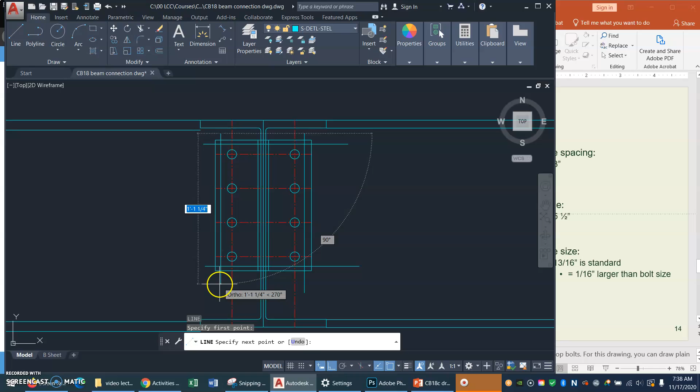Now I would like to trim this quickly. Oh, yeah. So I'm going to do my thing here where I just make a temporary line, some random line that I can trim to. I know this is not precise. Forgive me. If I wanted to be precise, what I sometimes do is I actually draw a bigger circle around each small circle and trim to that circle.

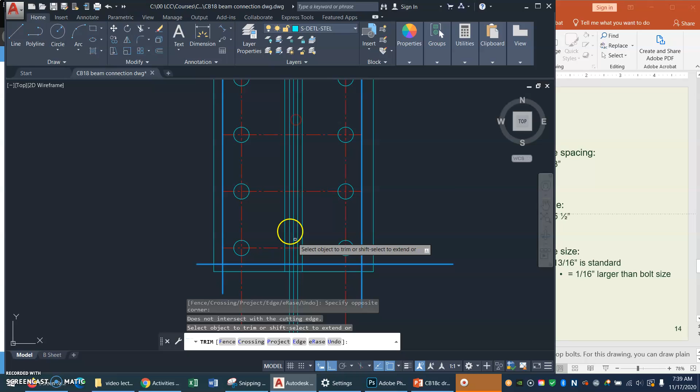Okay, and why I'm doing this is I'm going to go TR for trim, select cutting edges. I'm going to select my temporary lines as my cutting edges, enter, and then I'm going to do a right crossing window and select my center lines to trim. This can go wrong if you zoom the wrong way. And there. Okay, good. Now I can delete my temporary lines, and I've got some nice looking center lines. See that?

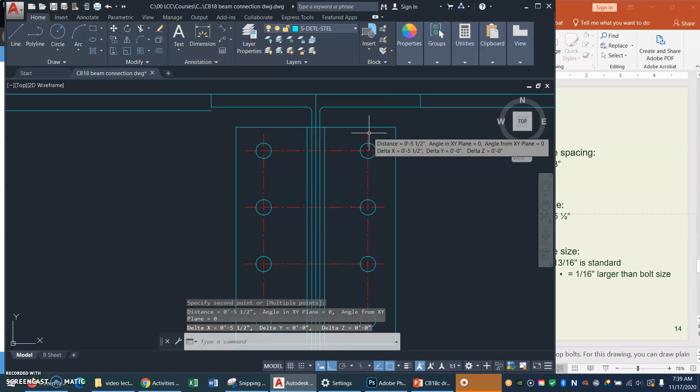Okay, I could now put these center lines up in my top view. You know what? I want to make sure that these really are 5.5 inches apart. So I think I will get the distance command, DI for distance, and just measure from here to here. Yeah, it is 5.5, so good. Yay.

Now, how about I get on the center line layer, and I will draw a line from here up to here. I'm going to snag onto the end point of my center line, you see, and go up here. And now I will just grab that grip and move it up here. Maybe these lines are not a precise length. That's probably okay. They don't tell us what the gauge is.

Something looks bad. Oh, I see. See how these angle irons are not lined up? Do you know why that is? Because this big beam over here has a thicker web than this little beam over here, which has a thinner web. So if you bolt these angles to these webs, they're not going to be totally lined up. Ha!

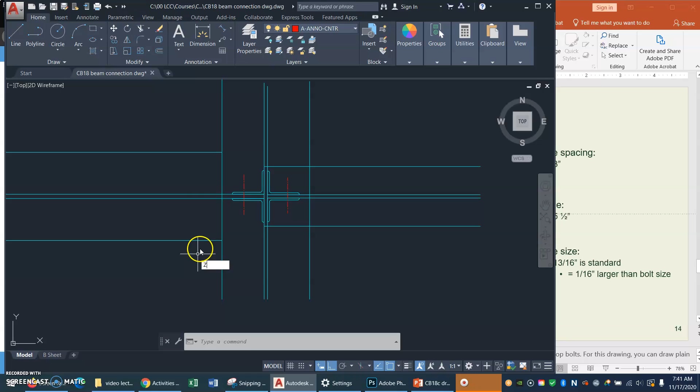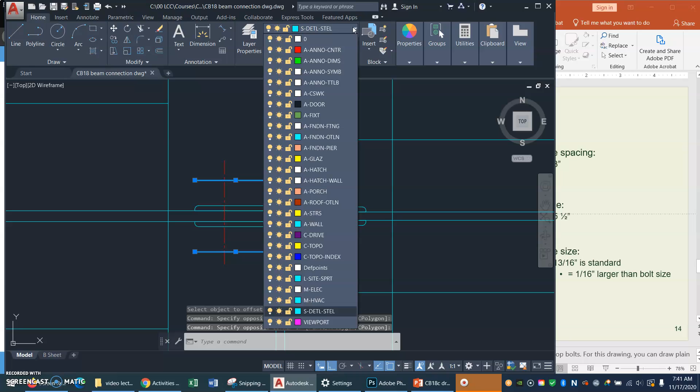We don't know what the gauge is front to back, so I think what I'm going to do is just put center lines in approximately the middle here. I think I will go offset 1.5, and I will just offset 1.5 from here up and here down, and I will be cool and change these to center lines. So I'll select those lines and click on the center layer.

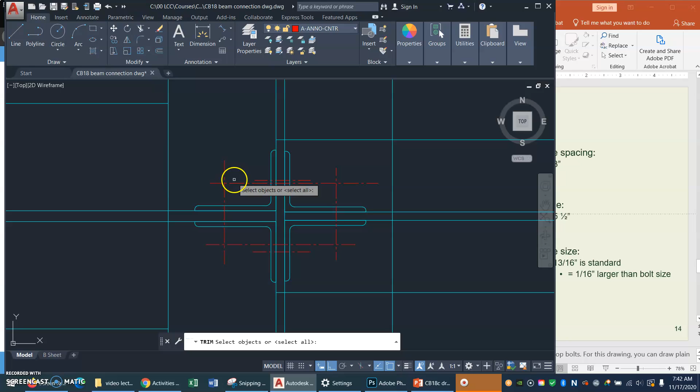And now I'll just move these lines over here and maybe shorten them up a little bit. Click on the grip and move it over. I grant you these look too long. Alright, fine. I will do a trimmy thing. I'll make a temporary line and a temporary line. I'll say trim, and I'll use this temporary line as my cutter, and I'll trim, trim, trim my two center lines, and now I can erase, E for erase, those two temporary cutters. Okay, there's that.

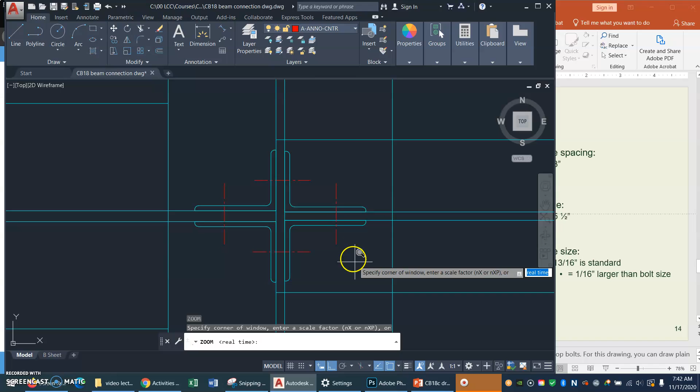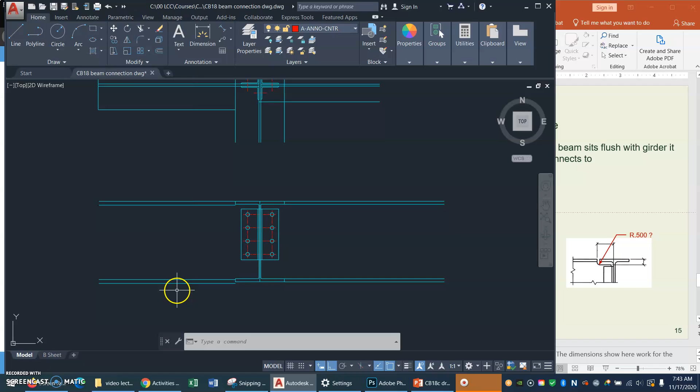Now I think we want to do the cope, don't we? So according to this, the cope is going to be 6 inches to the side of the center line. Is that right? No, it's going to be 6 inches out from the web on each side. That means I probably don't need this center line in here anymore. I was saving that center line in order to make the cope, but apparently we don't need it. So I'll just erase it.

All right, what are we doing? We're coping 6 inches out from the inside of the web on each side. So I will get an offset command, and I will offset a distance of 6, select the web, offset, select the web, offset.

And now, to make this easy, I'm going to get the extend command, which is hiding under the trim command. See, there it is, extend, or you can type EX for extend. And for my fence to extend to, I'm going to use the outside surfaces of the flanges. Enter. And now I'm going to click the end of the line that I want to extend.

Okay, that is where my cope is going to land. We'll come back to that in just a second. And according to this, on the top of the beam, we'll cut down 1.25 inches. On the bottom of the beam, we'll cut up 1.25 inches on one side and 1.75 inches on the other side. Alrighty.

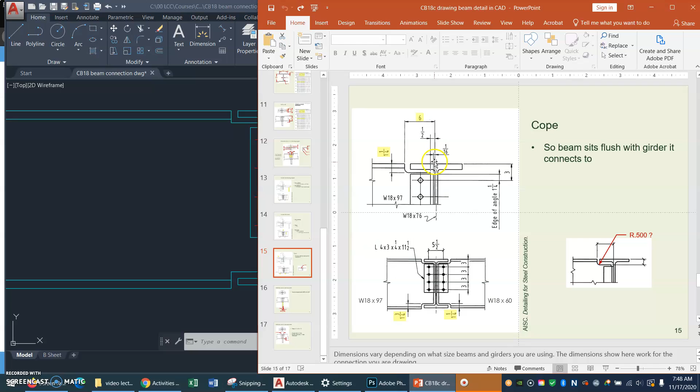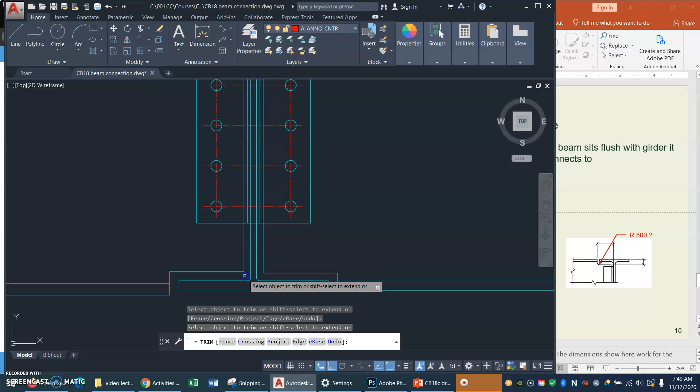Okay, so I'm going to offset 1/2 inch from each side of the web, and then I'm going to trim my angle iron, the end of the beam. Oh, sorry. All right. Now I've got to trim my beam out from behind this angle iron. So trim again, and I'll make the ends of my angle iron my cutters so that I can trim out the end of the beam here.

There we go. Now I need to put a radius in this corner. If we leave this inside corner sharp, that will create a stress riser and these beams will crack immediately. So that is why we do a radius, and I will just try a radius of 1/2 inch and see if that works. Oops, sorry. Radius, R. That was my mistake. 0.5. Okay.

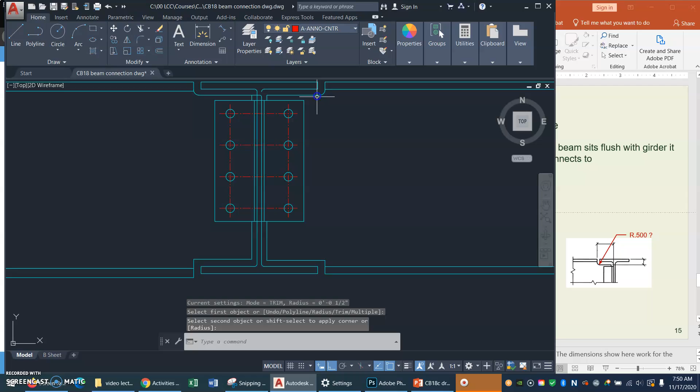Okay, enter to bring it up again. Enter to bring it up again. Okay, what else is happening? Oh, now I didn't finish trimming up the stuff in the top view, did I?

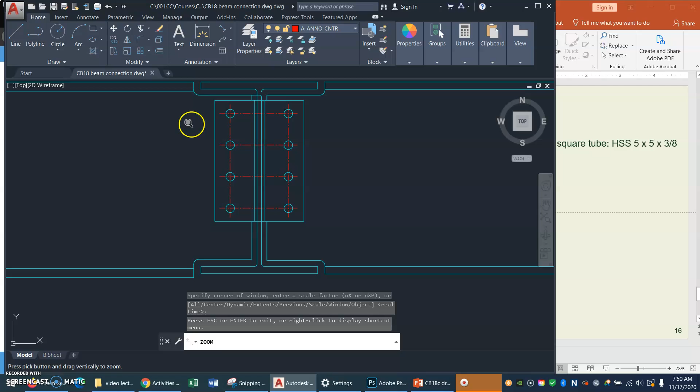Oh, something is bad here. I did something bad. I don't know what. I don't know what the heck is happening here, but it needs to stop. I don't know what that is. That is something funky right there. And erase that. This happens. Do not worry. And extend. There, all fixed up. Okay.